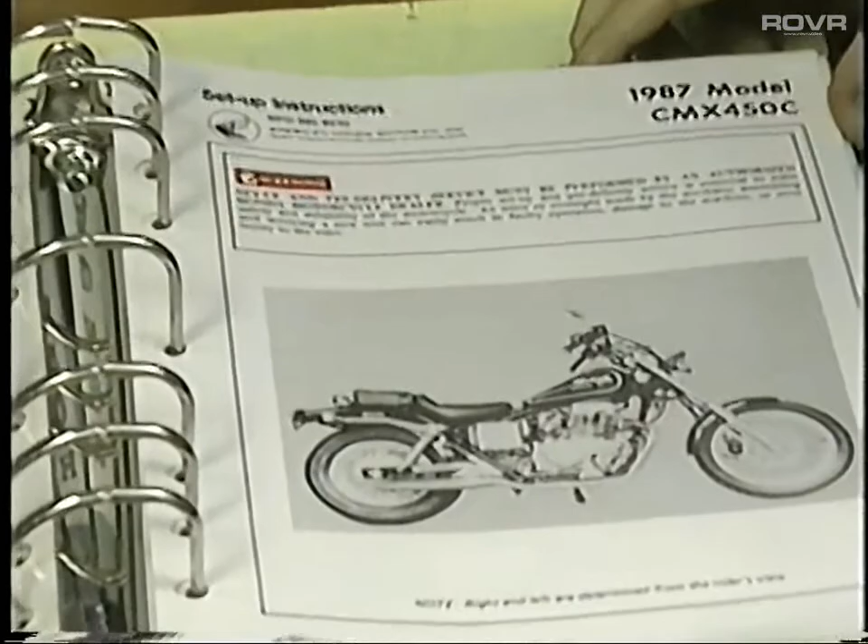We also got in this new full-cycle video on setup and pre-delivery service. It'll help you understand the correct procedures. After viewing the program and using the setup instructions, you should be able to uncrate the unit properly, assemble the parts, complete the setup checklist, and clean the vehicle thoroughly for display.

The second part of the program will guide you through the pre-delivery service procedures. By using the pre-delivery checklist, you should be able to check all fluids, check the tire pressure, then after starting the engine, check the charging system, and take a test ride to make sure everything works properly. Then clean the vehicle thoroughly for delivery to the customer.

Piece of cake! There's a VCR in the lunchroom. Study the tape, the instructions, and the checklist, and then go ahead and set up this Rebel. If you have any questions or problems, just ask. I'll check in on you from time to time. No problem.

Set up instructions and tape.

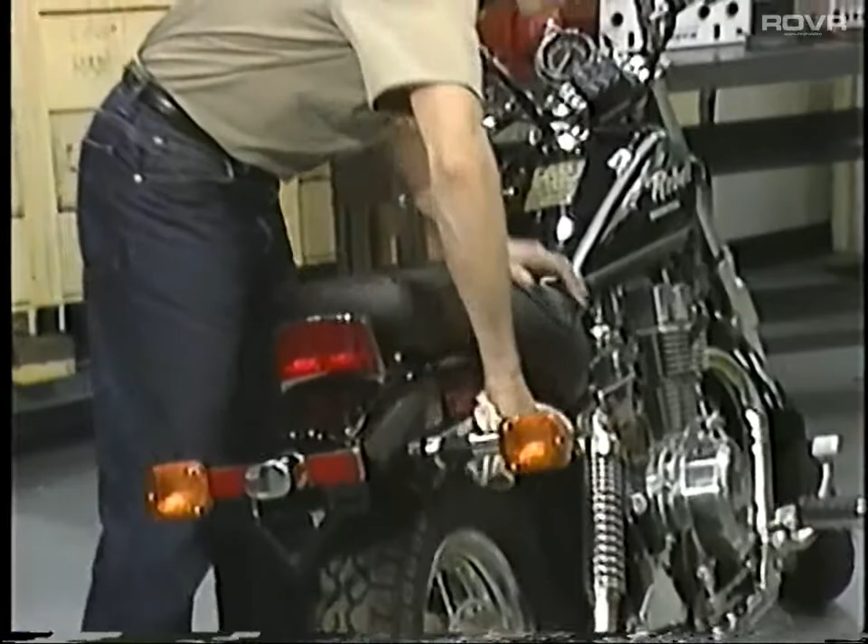Hi, Mike. How's the new Rebel coming along? Just great. She's ready to roll. By the way, the setup instructions and your service tips helped a lot. They really made sense. Thanks. Looks pretty good. Not bad for your first assignment.

But just to make sure, Mike, could you tell me what you did beyond tightening a few bolts and adding a little gasoline? Sure, it wasn't that hard. Well, first of all, I followed the correct setup instructions. They're easy to use. Right, because if you don't, you might damage some parts during uncrating or assembly.

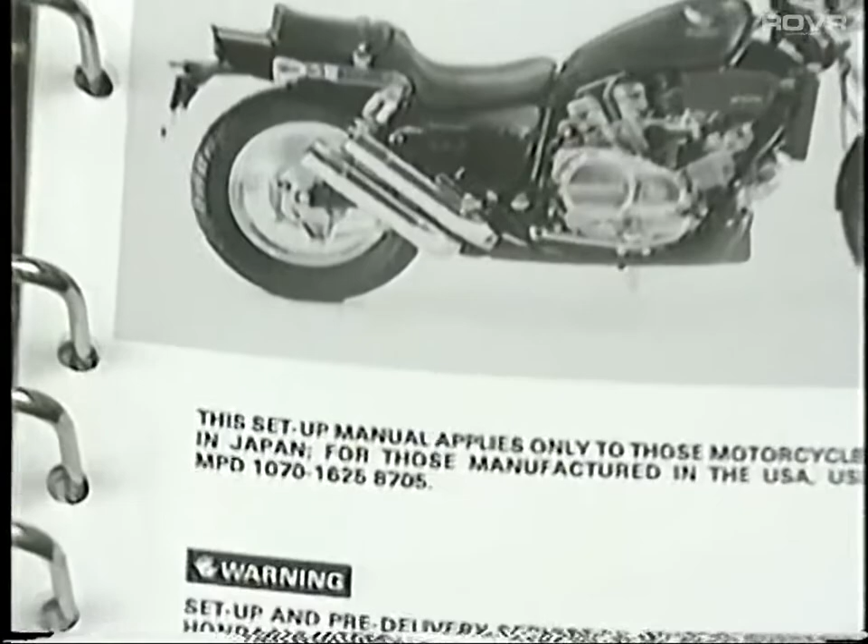But why do some models have two different setup instructions? Because they are manufactured in both Ohio and Japan. It just depends where it was made.

If the motorcycle were made in Ohio, it would be packed in a wood-framed crate. On the other hand, motorcycles made in Japan are packed in metal-framed crates. Each has a different version of setup instructions.

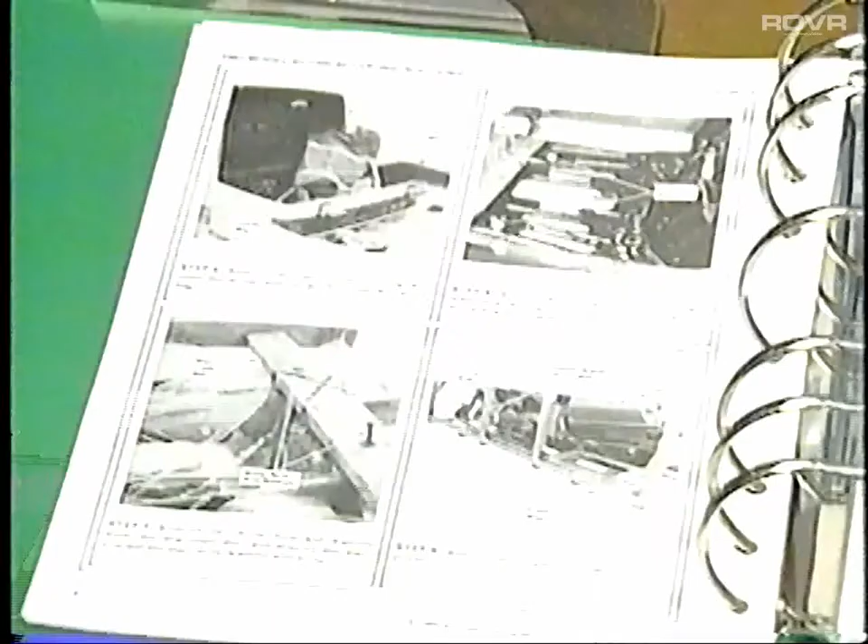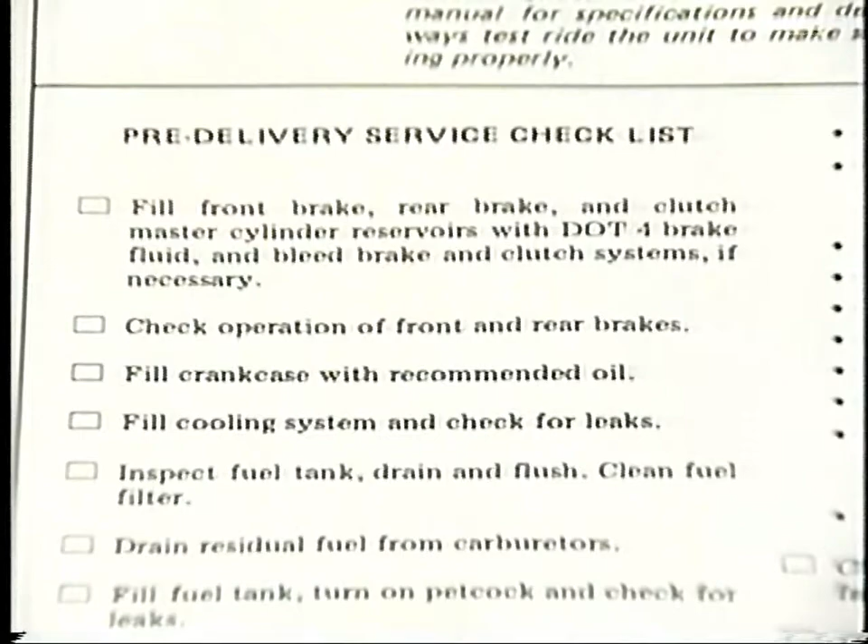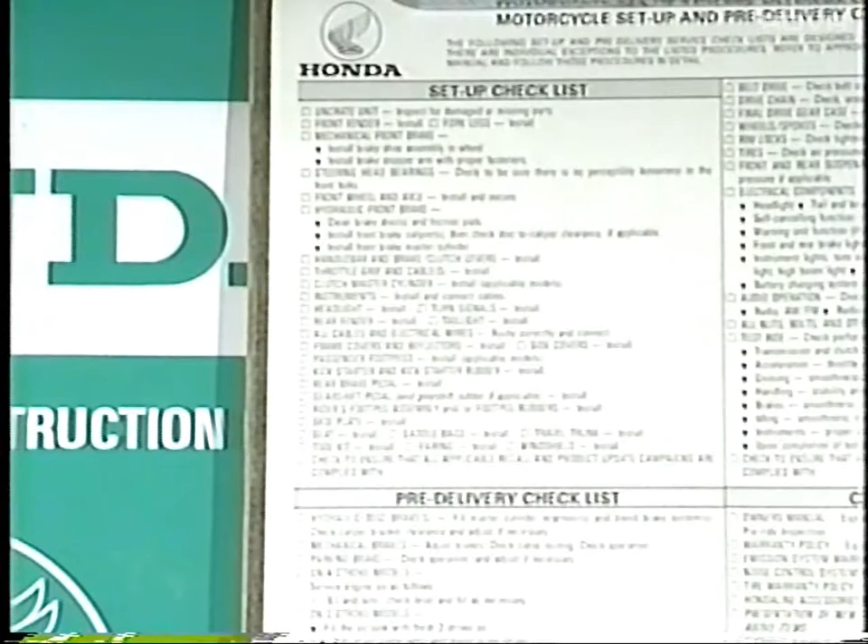The setup instructions have been going through some changes. Older versions have photos in each quarter of the page, with setup and pre-delivery combined. But newer versions contain photos on the right side of the page. Also, pre-delivery service procedures are separated from the setup section.

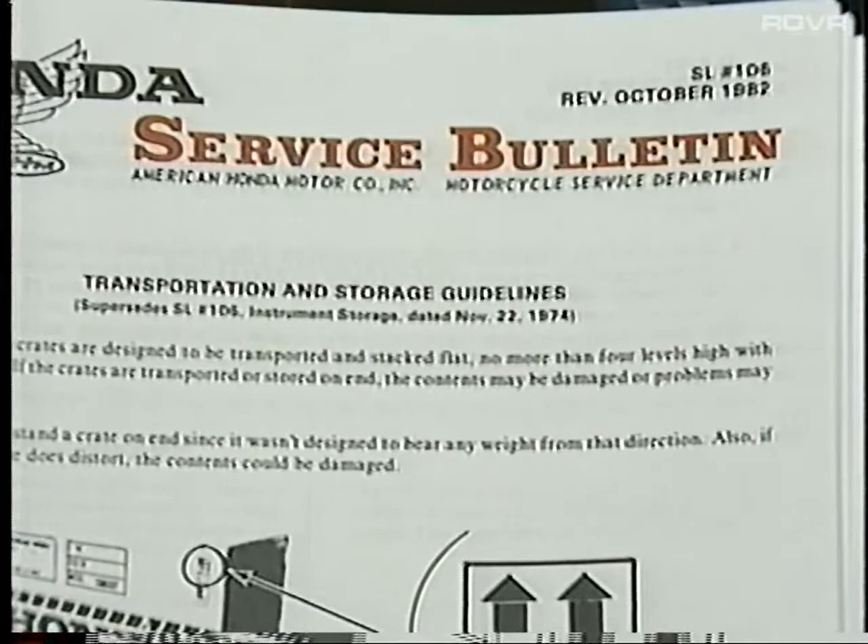So what did you do next? Well, before I started the actual setup, I checked for any service letters that pertain to storage and setup, like service letter number 106. Also, I checked for any service bulletins and important setup notices for that model.

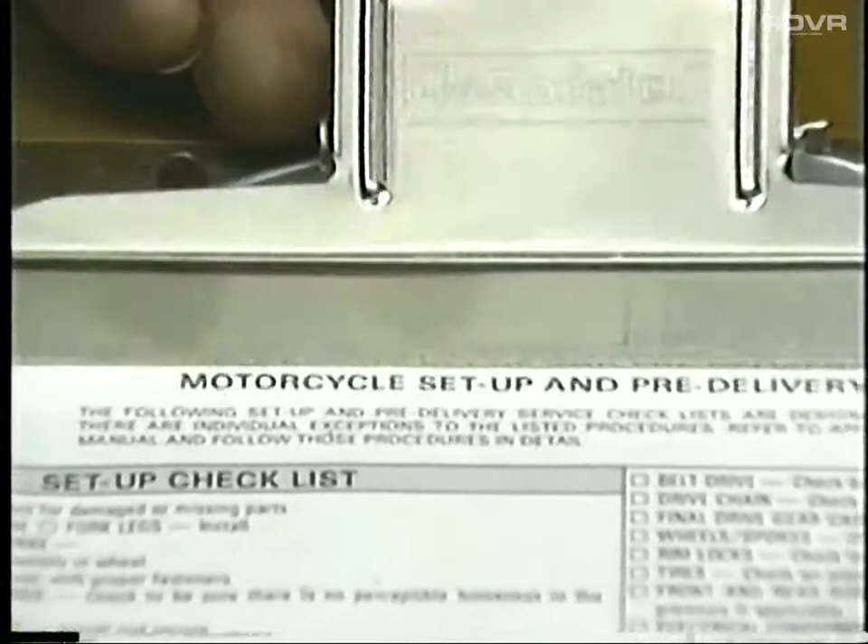Motorcycles, scooters, and ATVs each have a different checklist. I used the motorcycle setup and pre-delivery checklist to check off the steps as I completed them. Of course, before I even uncrated the motorcycle, I read through the setup instructions first. And, as you suggested, I walked around the cycle and checked for transportation damage.

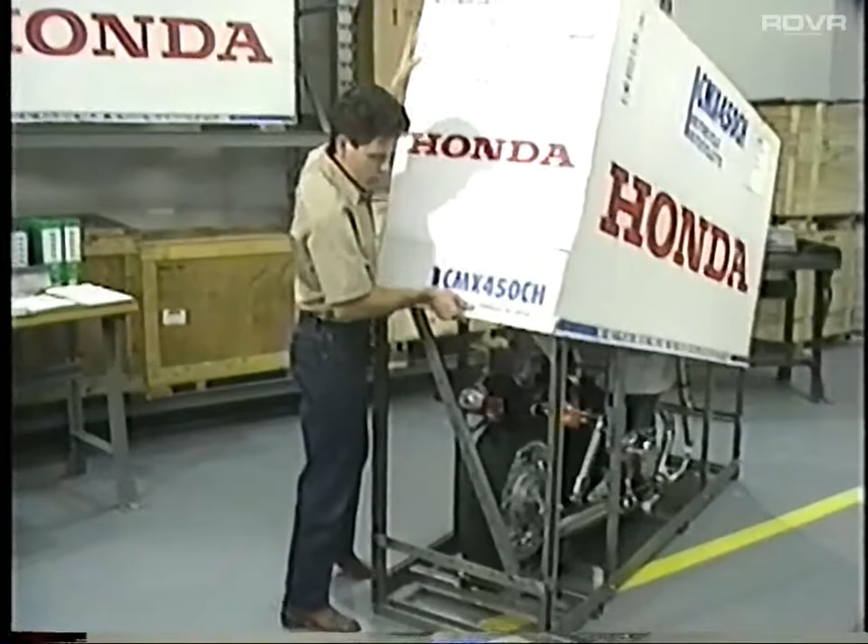Then I cut the straps, removed the carton, and noticed that it was mostly assembled. But on this model, certain parts like the front wheel, handlebars, switches, cables, and seat needed to be installed.

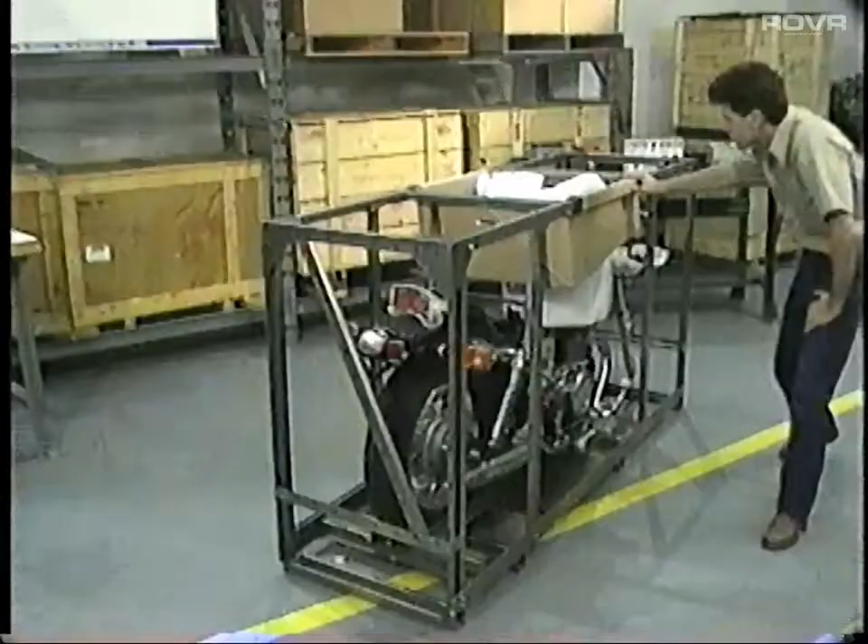So I checked again for transportation damage. The rules for submitting damage claims are defined in Chapter 10 of the Motorcycle Warranty Policy and Procedure Manual.

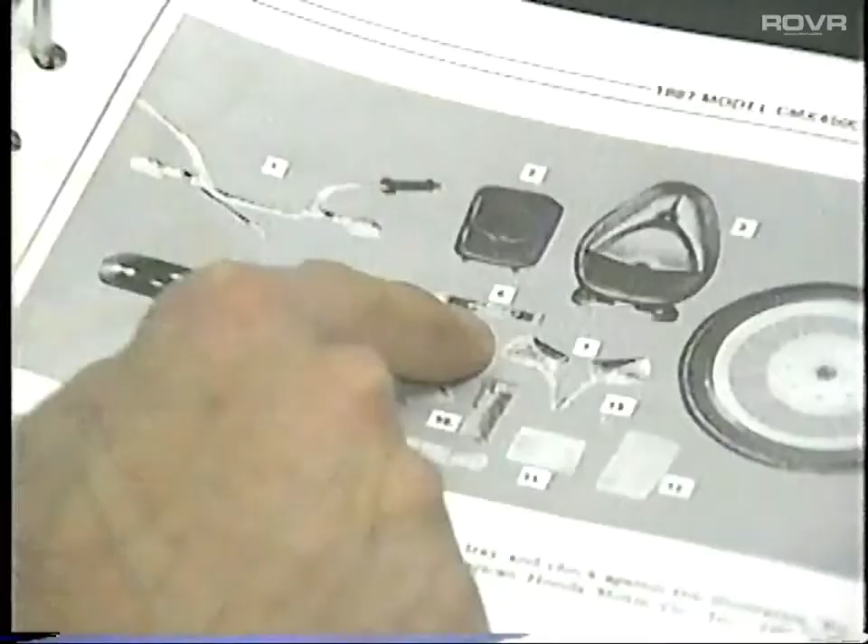So I compared the parts that came packed in the crate against the parts list in the setup instructions. If any loose parts were missing, I'd order them. Then I'd use the Warranty Transportation Claim Form to file a transportation damage claim with the manufacturer.

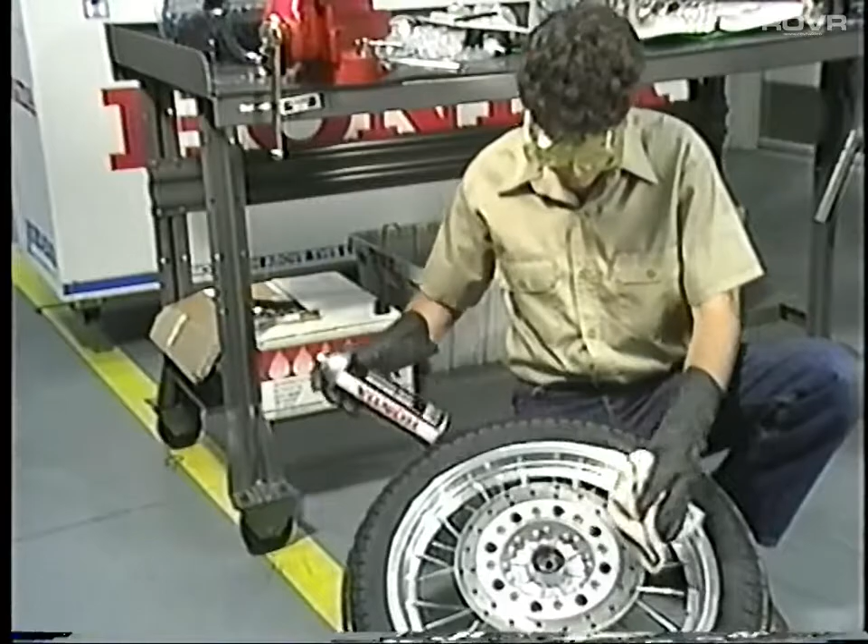Since the Rebel has disc brakes, I used Honda brake cleaner to degrease the discs. Brake cleaner could damage painted surfaces, so I kept it away from the other parts of the motorcycle. I also wore gloves and eye protection.

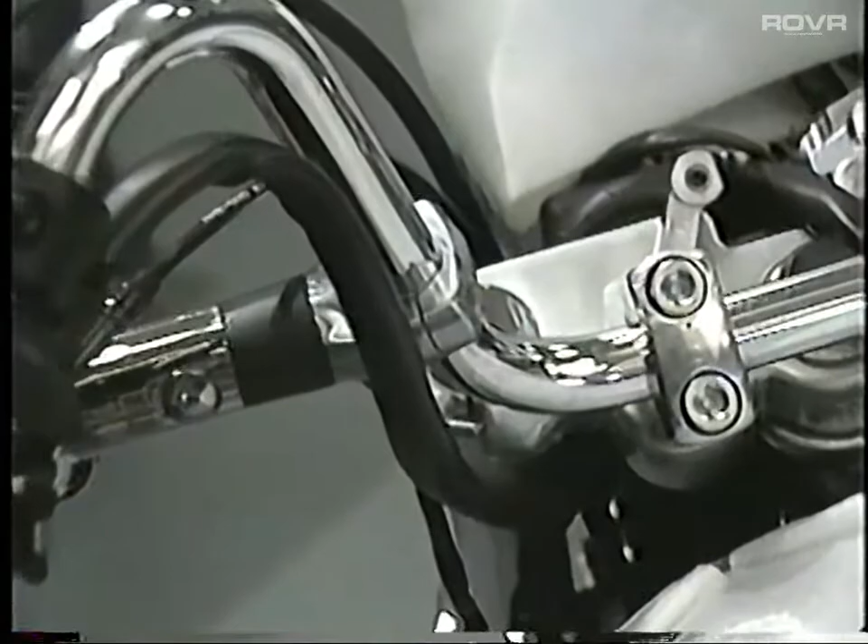When I installed the handlebars, I made sure the holders were facing the right direction, with the handlebar punch marks aligned with the lower holders. The front bolt should always be tightened first, then the back bolt.

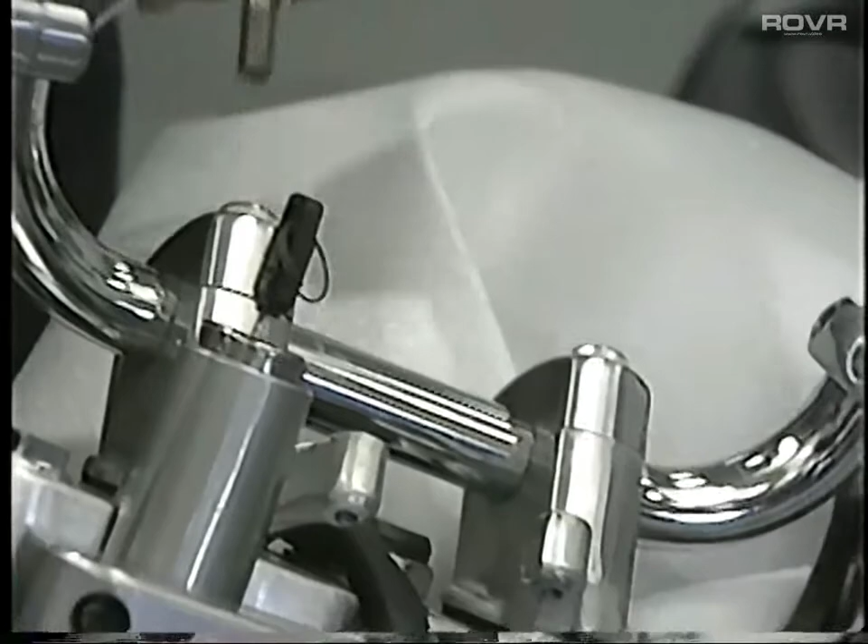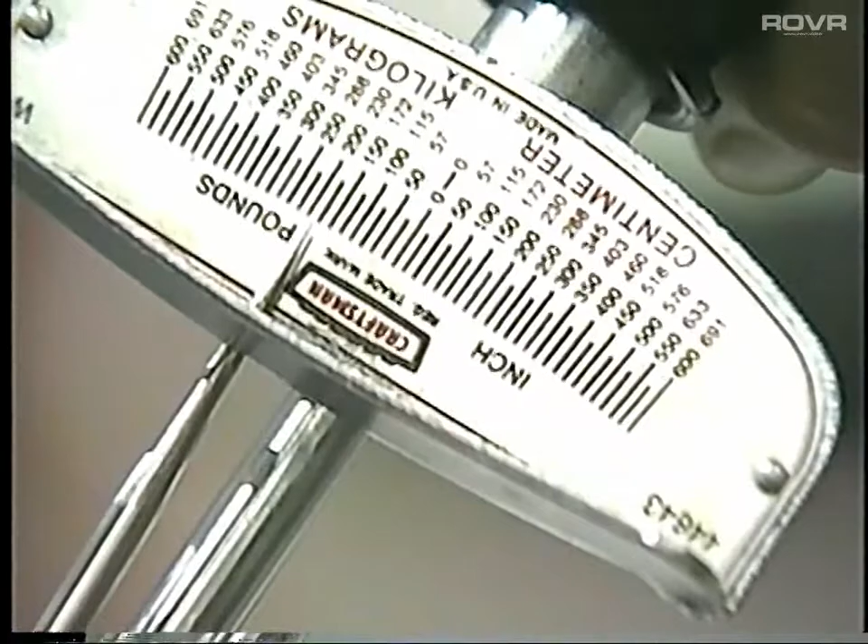Right, that way the back bolt acts as a pinch bolt. I used a torque wrench on those bolts instead of an air wrench, because you never know how much torque an air wrench is applying. And I torqued all bolts as specified according to the setup instructions.

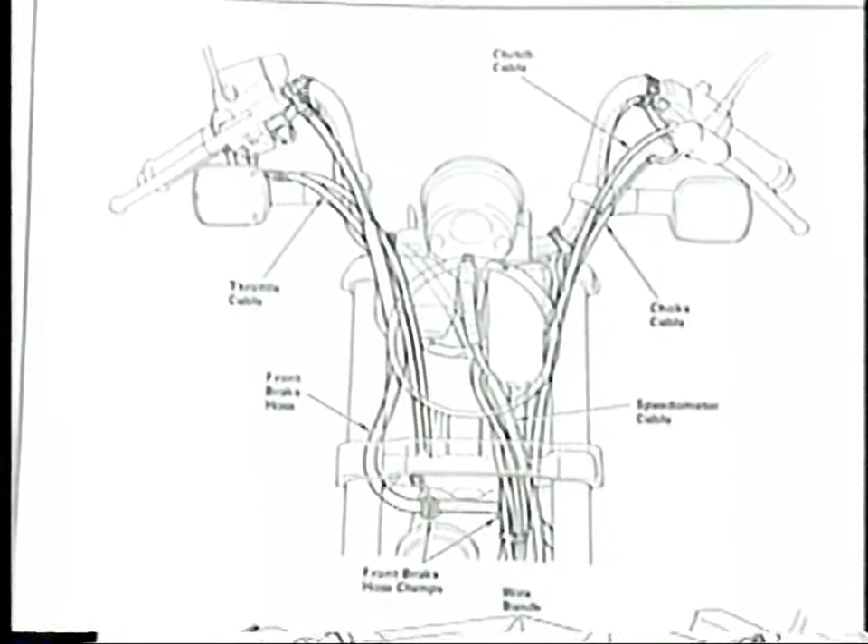When I installed the cables, I made sure they were routed properly by following the cable routing diagram in the setup instructions. That's really important, because if they're not routed properly, the controls won't work right.

I'd never done this before, but I read each step in the setup instructions before starting. I also checked off each item on the checklist as I went along, or wrote NA for not applicable.

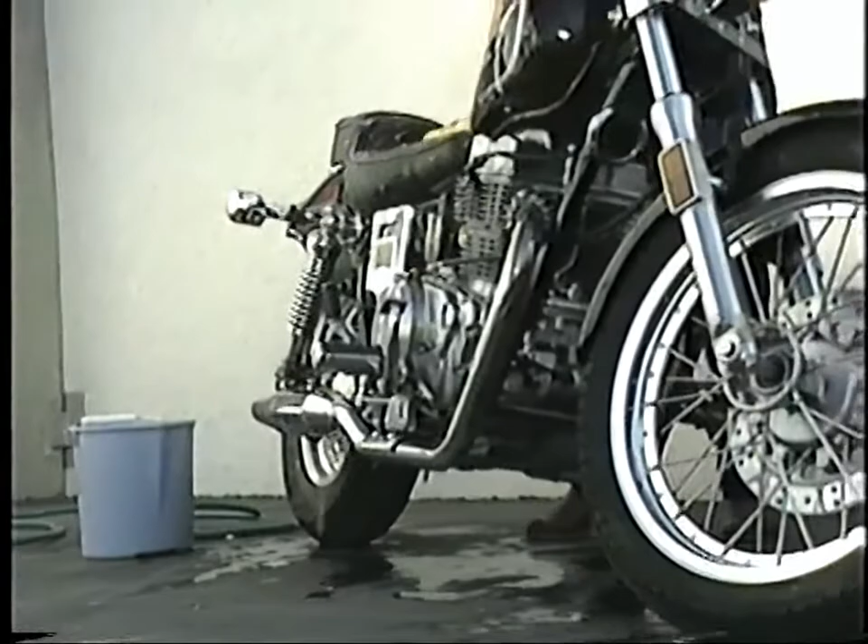Then I made sure I cleaned the motorcycle. New cycles are coated with a corrosion preventive grease, and some tires with raised letters have a protective blue coating. I used soap and water to clean all surfaces and then dried it thoroughly.

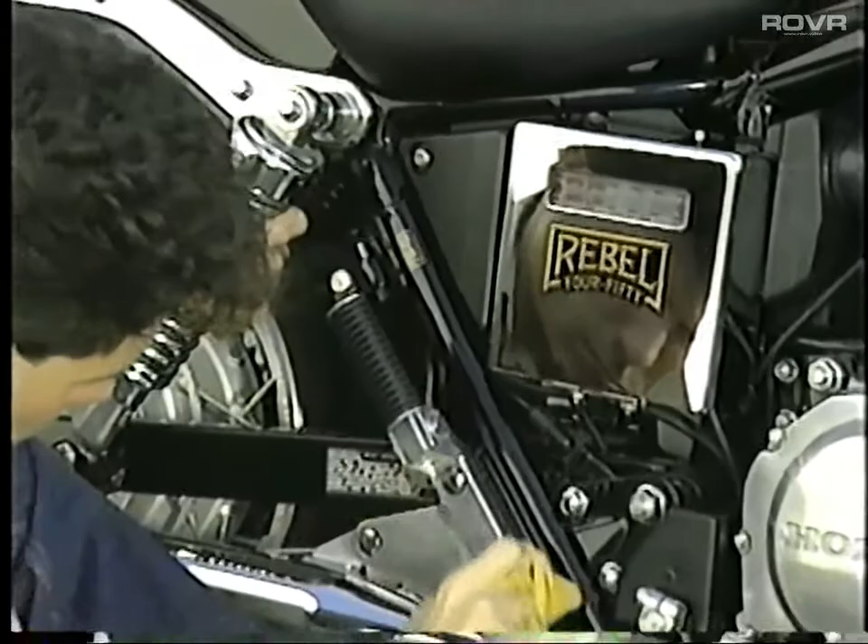Last but not least, I inspected the assembled motorcycle again, then reviewed the checklist to make sure I didn't forget anything. So that completes the setup procedure.

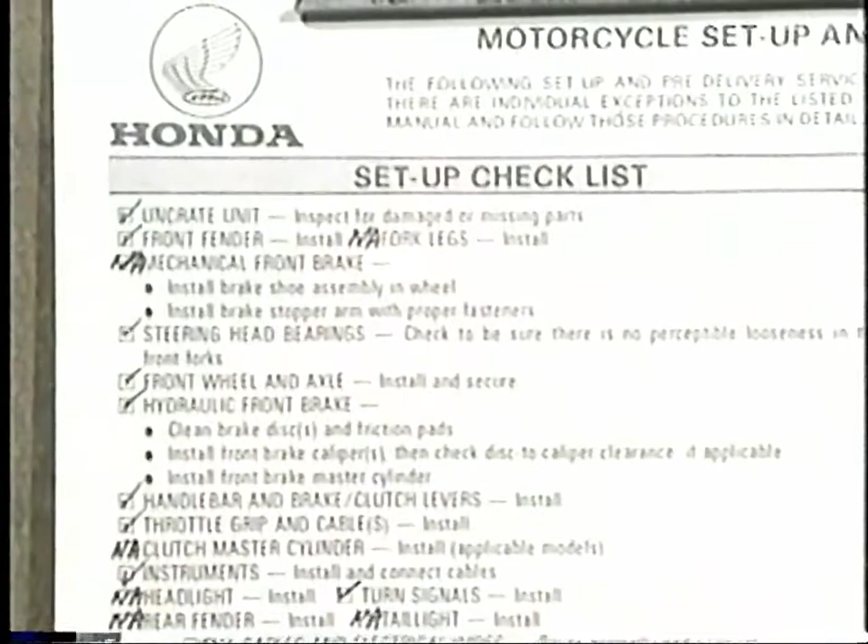Did you go through the pre-delivery service? Sure did, the instructions explained every step. And just as I did during the setup, I followed the pre-delivery checklist and checked off the items as they were completed.

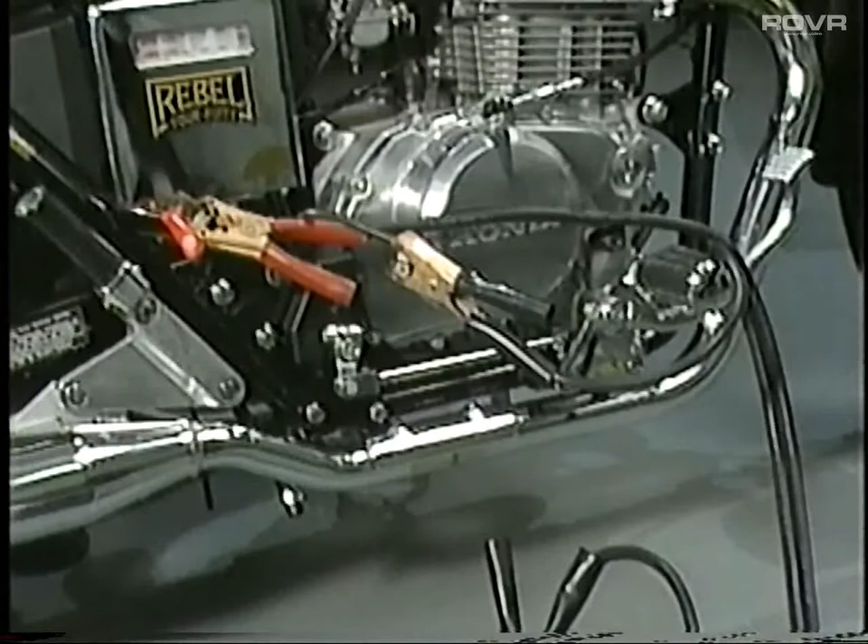What about the battery? I activated it according to service letter number 48. Something to remember, Mike: for display models, you use a shop battery for your testing instead of activating the new battery, since an activated battery needs regular charging to prevent sulfation.

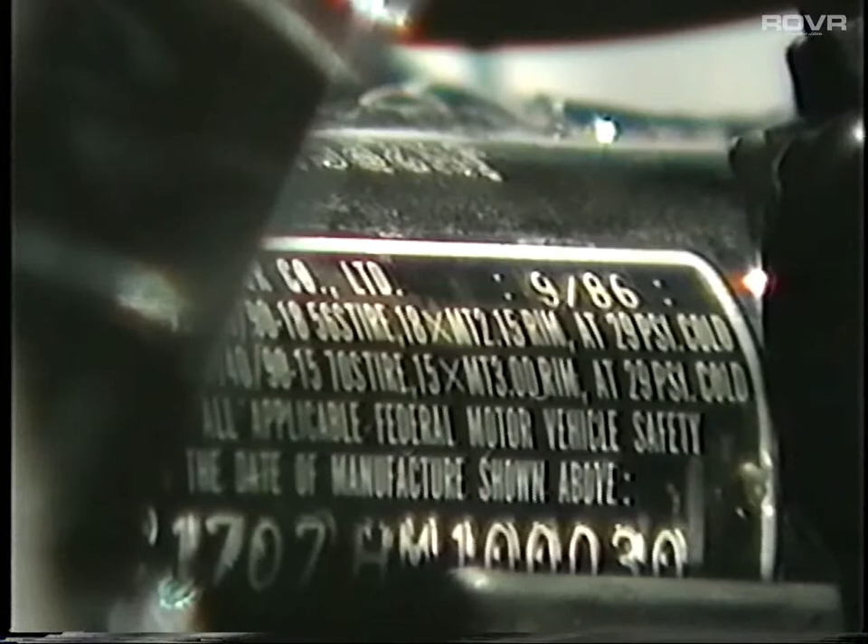After that, I followed your suggestion and checked the date of manufacture on the steering head of the motorcycle. If more than two years have gone by since it was manufactured, you'd have to flush the brake system and the fuel tank, and if it sat for more than a year after setup, change the crankcase oil.

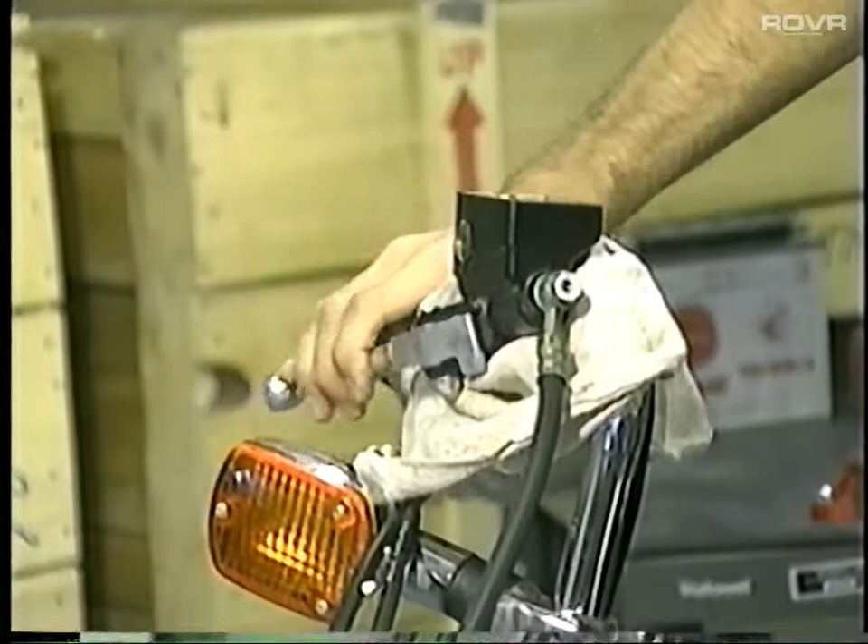How do you flush the brake system? It's easy. Just open the master cylinder and the bleeder valve, squeeze the handbrake, drain the fluid and replace it, then bleed the system as shown in the service manual.

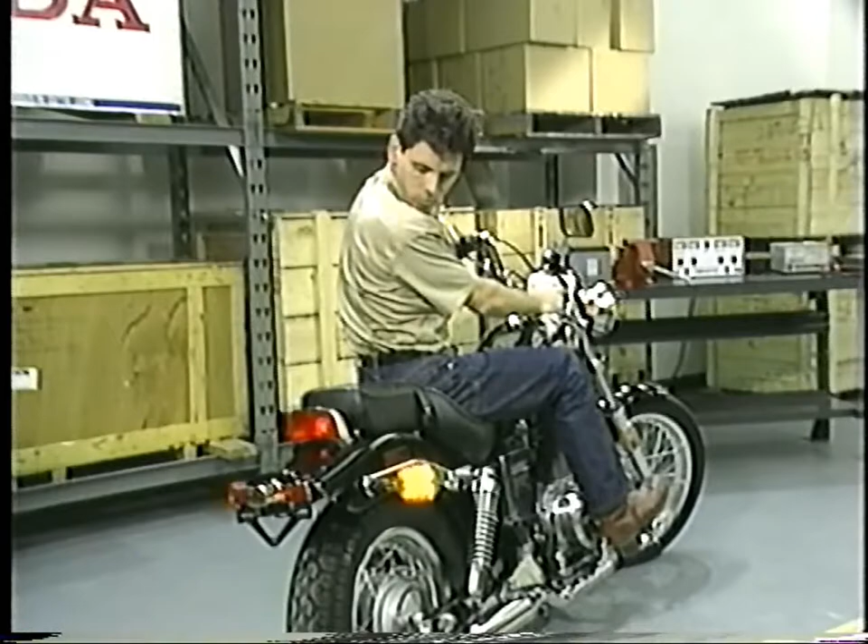Then I checked the air pressure in the tires and inflated them to the maximum recommended pressure. I also checked out the charging system and the components to see if they work properly. That's important, because we are legally responsible for any assembly or adjustments that aren't done properly.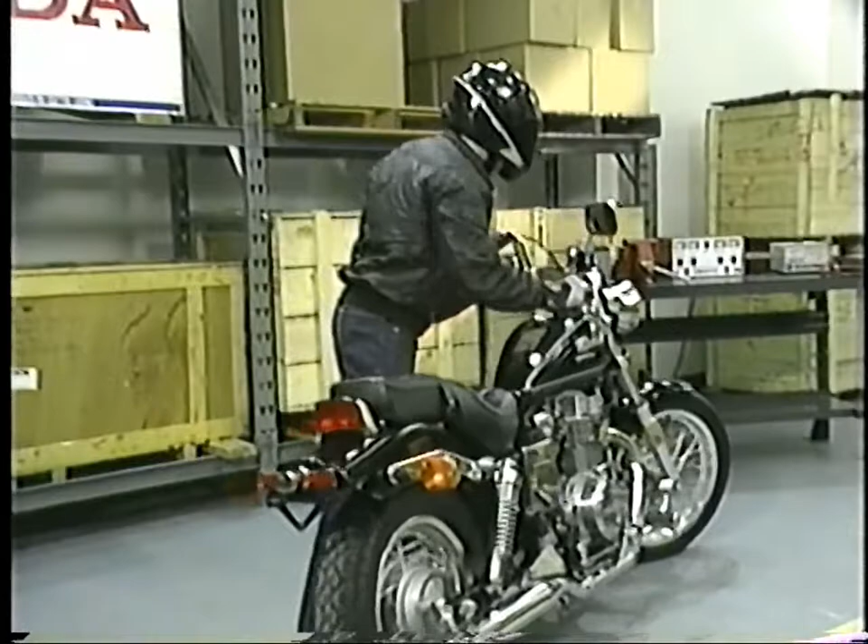So I made sure by taking a short test ride to see if everything worked. I hope it was short, because in some states, 25 miles on a vehicle means that it's used. So I then checked off the items on the pre-delivery checklist.

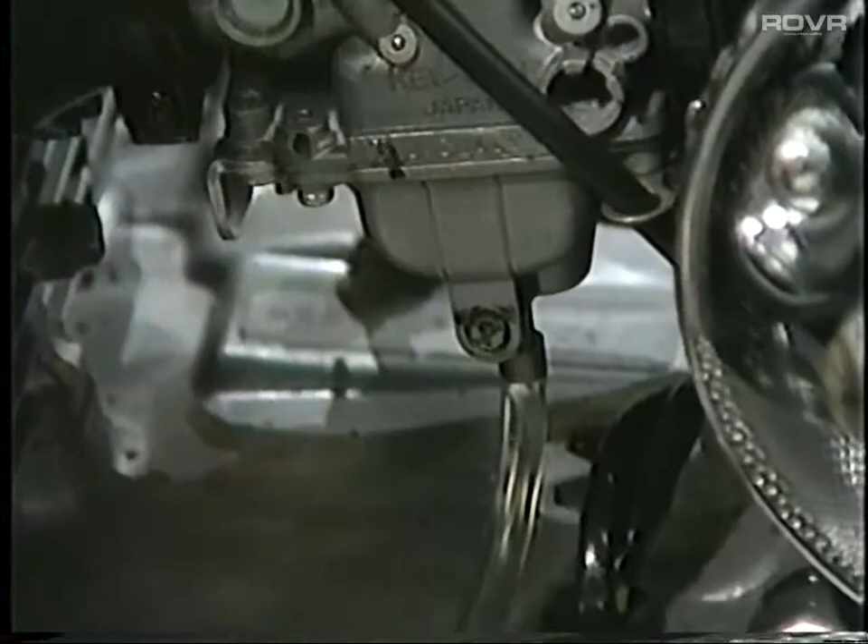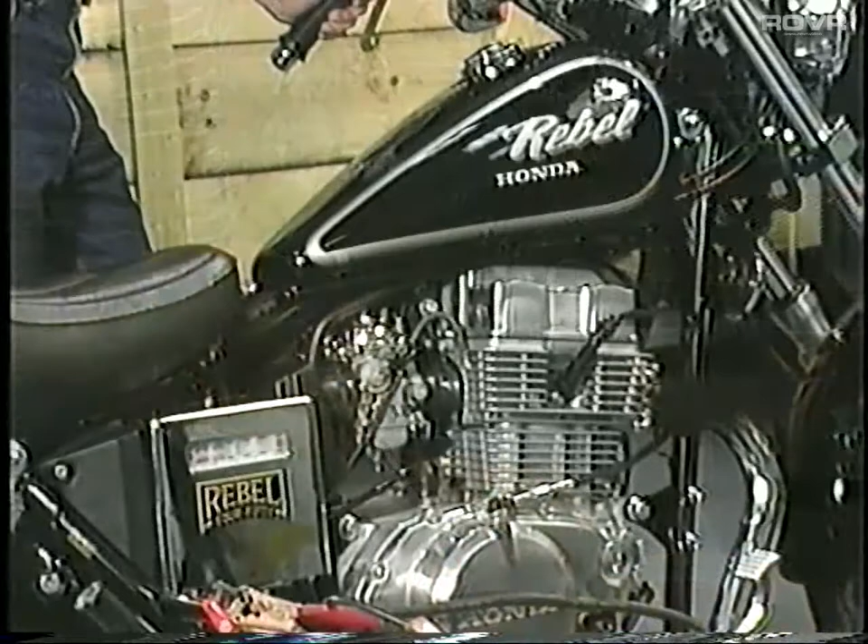Another thing to remember: on a display model, after the test ride, you need to drain the fuel tank and carburetors, since gas turns into varnish and can plug the carb's pilot circuits. After the carburetors are drained, you start the engine and let it run until the carbs are completely empty. Most states prohibit storing vehicles filled with gasoline.

So, what's next? After that, I made sure the motorcycle was spotless, since it's the customer's first impression of his new motorcycle. Well, since this motorcycle is sold and the owner will be here soon, tell me how you prepared this cycle for customer delivery. Well, first, I set up and charged the battery.

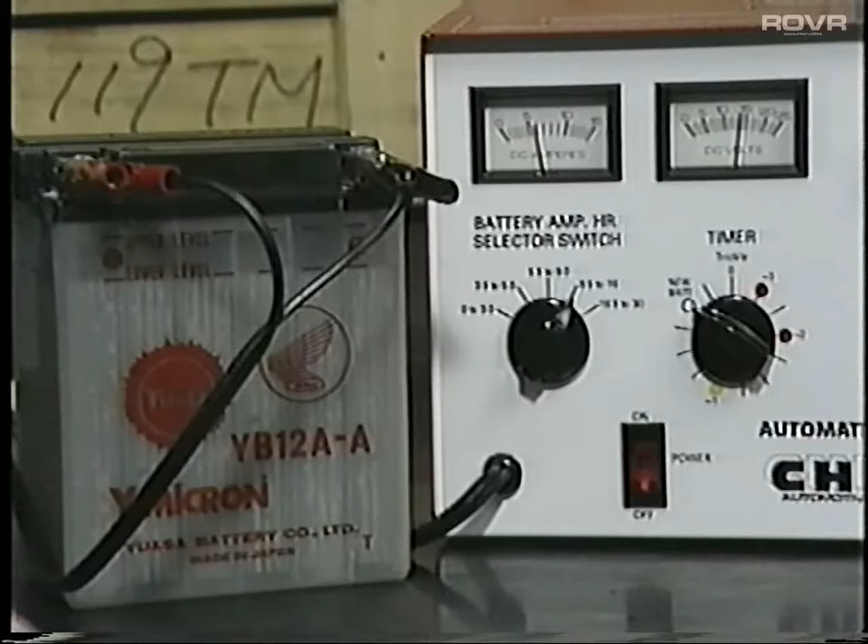Then, I filled the fuel tank with fresh gas to get the customer off to a good start. Another reason to fill the tank completely is that the inside of the tank is coated with a corrosion inhibitor, which dissolves in gasoline. So if you only put in a small amount of gasoline, the strength of the dissolved inhibitor may cause carb problems later. Right. When you top off the fuel tank, the inhibitor is thinned enough to prevent creating problems in the carburetor's fuel circuit.

After that, I took a second test ride to make sure the carburetors and other systems were working properly. I then looked over the checklist to make sure that I didn't miss anything. Then I signed the setup checklist.

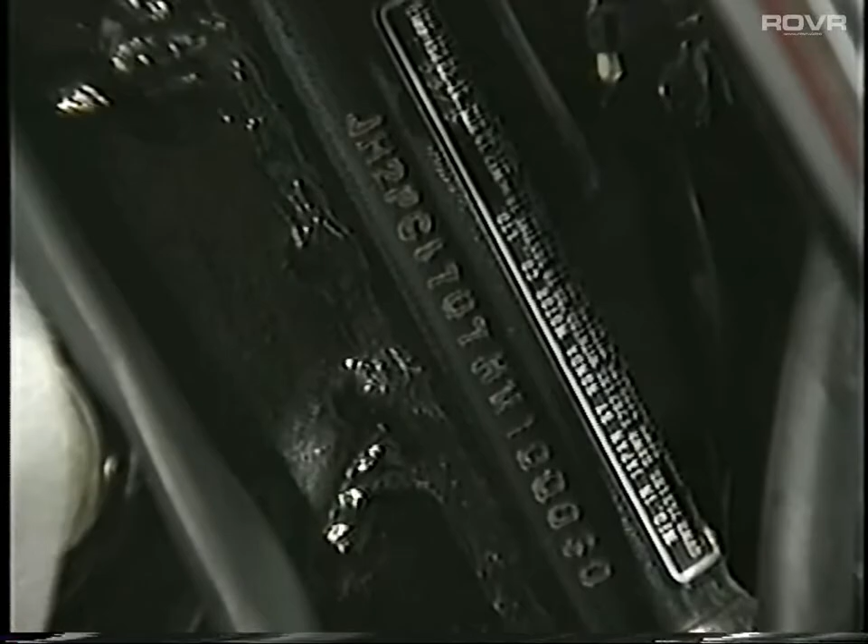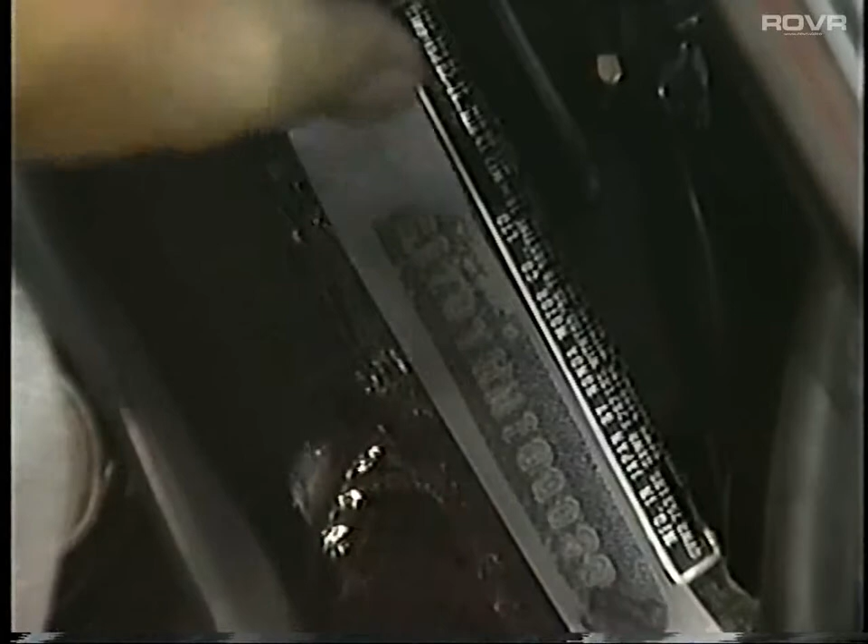Some state regulations require an imprint of the serial number for the record. Simply rub a piece of carbon paper over the number, stick a piece of clear tape over it, and peel the tape off. Then you apply the tape with the serial number imprint on a sheet of paper and keep it with the dealer's copy of the setup checklist.

And finally, I made sure the motorcycle was completely clean and ready to go. You got it, Mike. Also, if you notice any cosmetic damage which may have occurred in the shop or the showroom, order those parts. Such damage is our responsibility, and it can't be submitted on a warranty transportation claim.

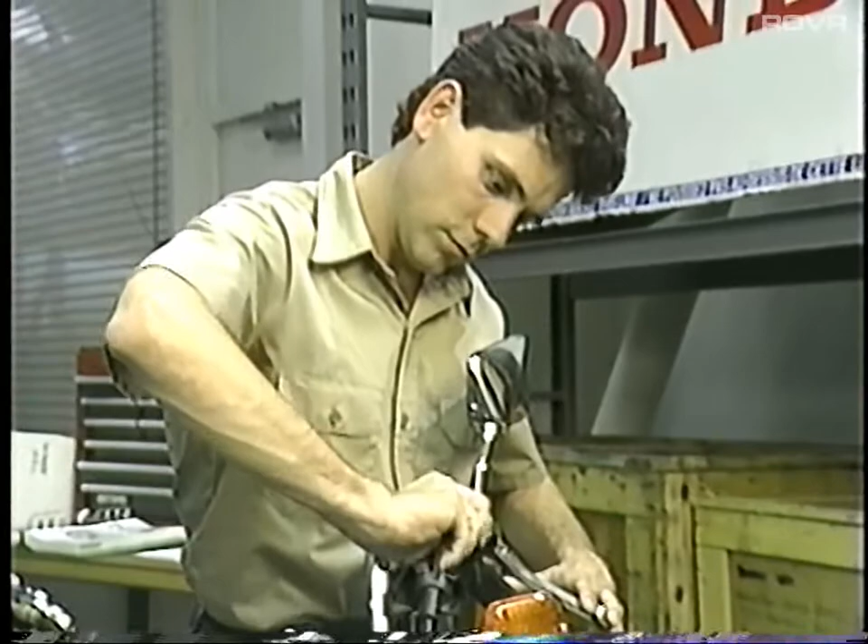Remember, proper setup and pre-delivery service are essential to reliability and rider safety. Basically, you need to make sure the motorcycle is fully assembled. Take a test ride to check functions, and clean the motorcycle so it looks new.

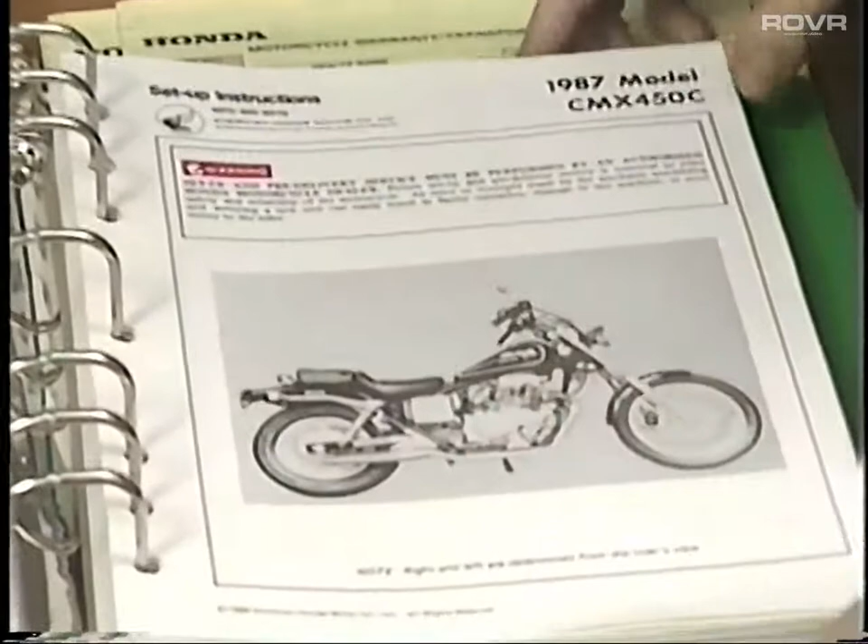Always use the correct year and model setup instructions for the motorcycle, scooter, or ATV you're working on. Then check the service bulletins and important service reminders to see if any improvements have been made. Before you remove the unit from the crate, check for shipping damage and any missing parts from the factory.

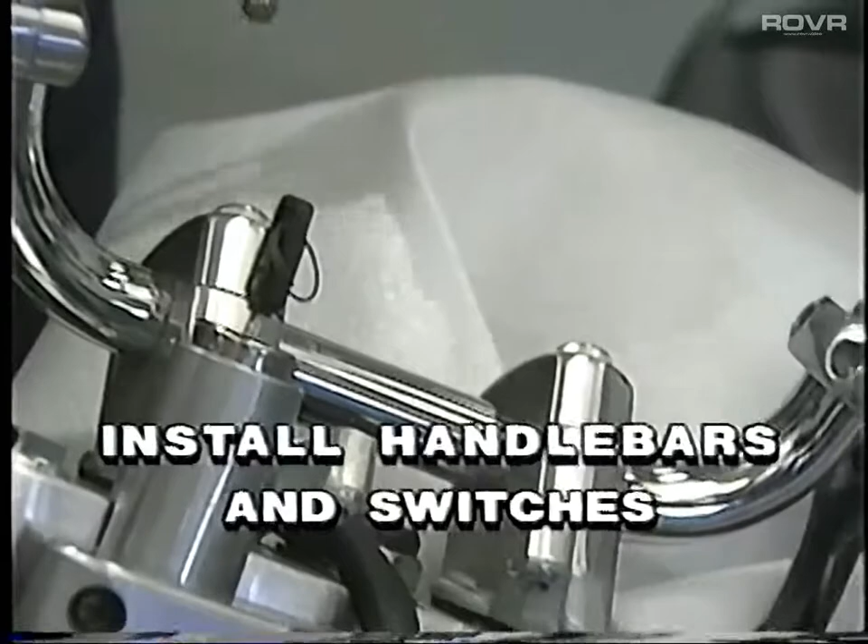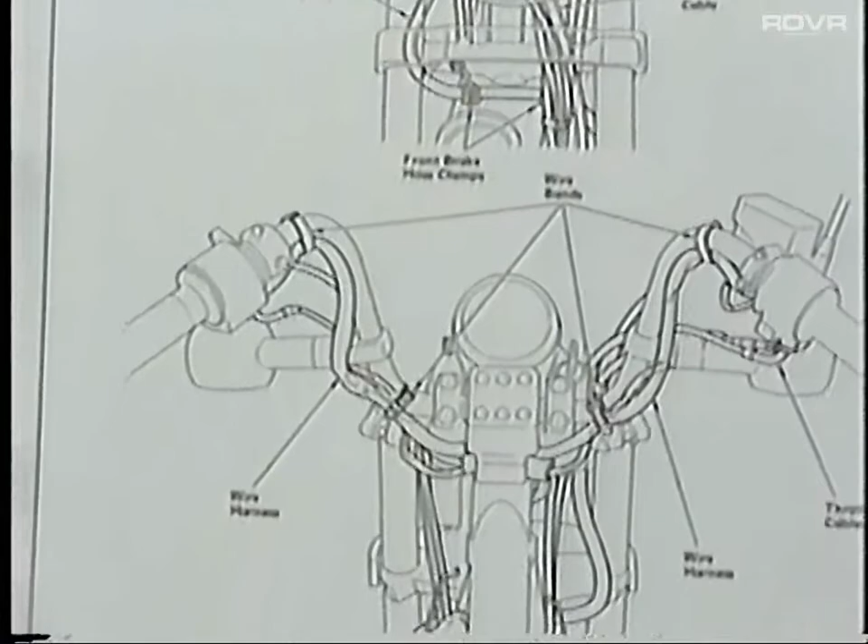If that model has disc brakes, use Honda brake cleaner. Make sure to install the handlebars and switches according to setup instructions. Torque the specified bolts according to the setup instructions. Using the cable routing procedure in the setup instructions will ensure routing the cables properly, especially around the handlebars.

You should clean the motorcycle with mild soap and water. Then check for scratches, dents, or other cosmetic damage. Order the parts if necessary.

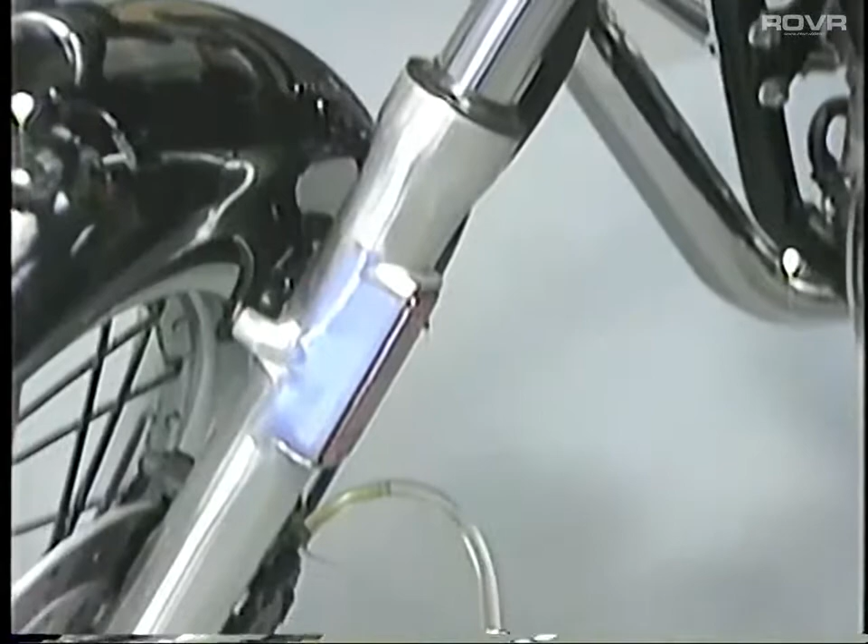So, Mike, after you're done with setup, what do you do? Well, you do pre-delivery service. First, I'd change the oil if the motorcycle has been sitting for over a year. I'd also change the brake fluid if the motorcycle sat for 2 years since it was manufactured, and then flush the fuel tank.

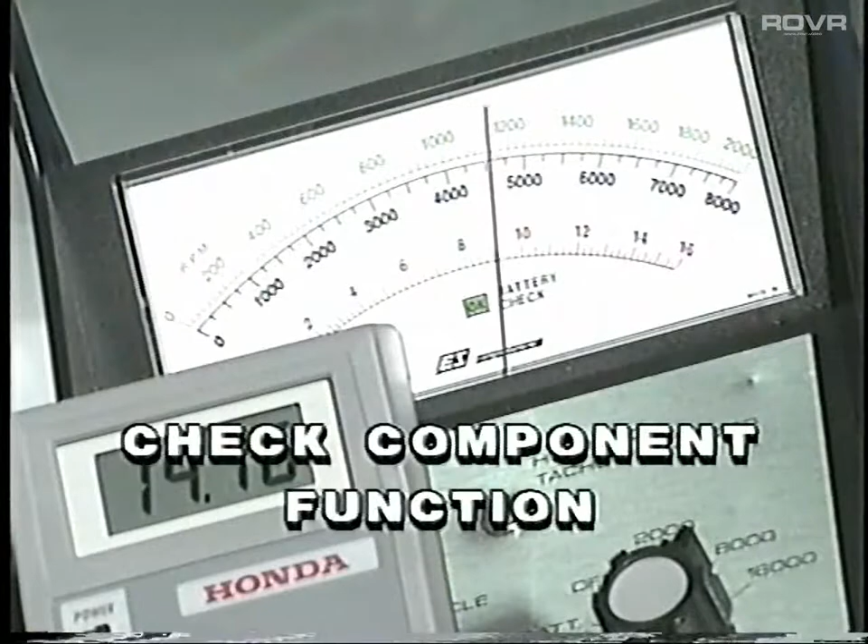You inflate the tires to maximum recommended pressure. Then check all the components to see if they work okay. If they don't, you fix them. And don't forget to keep it clean.

Now, Mike, before the owner arrives, tell me the proper delivery procedures again. Well, you should fill the tank completely with fresh fuel. Then, take a test ride to make sure everything works the way it should. Then sign the setup and pre-delivery checklist form. You should check off the steps as they are completed.

Before delivery, you make sure the motorcycle is clean. Then take one last walk around the vehicle to check it out visually. That's right, Mike. When you follow the proper setup and pre-delivery service procedures, you'll prevent customer complaints in the future.

Thanks for getting me on the right track with the setup instructions. It really helped. No problem. In fact, the procedures we covered aren't just for this motorcycle. They pertain to scooters and ATVs as well. Feel you could set up some more today? Piece of cake. Come on, Mike, I want to show you something. We just got a new shipment in today. Good luck.